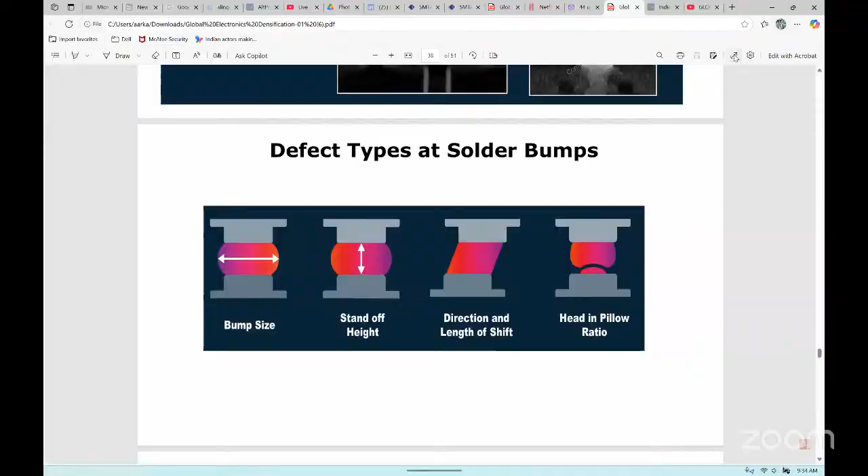Okay, great. Amba Prasad, before we jump onto the slide, can you give some background for our audience about what feedback and feed forward mechanisms in DFA are? Yeah, I can liberally say more than 90% of our audience are already aware what feedback is. It was there long ago. You do a design and you go for manufacturing, and the manufacturer will give feedback that certain components they're not able to mount or they're not able to meet certain parametrics. That is feedback. You take care of it in the next revision.

But feed forward means through design, proactively, we control things and we say to what extent you can tune, and then we freeze stack ups and termination values and things like that. And we tell the manufacturer to what extent they can tune and that they cannot go beyond the process window. So that is feed forward. Feed forward is fixed based on PDKs and ADKs given by the semiconductor fab houses.

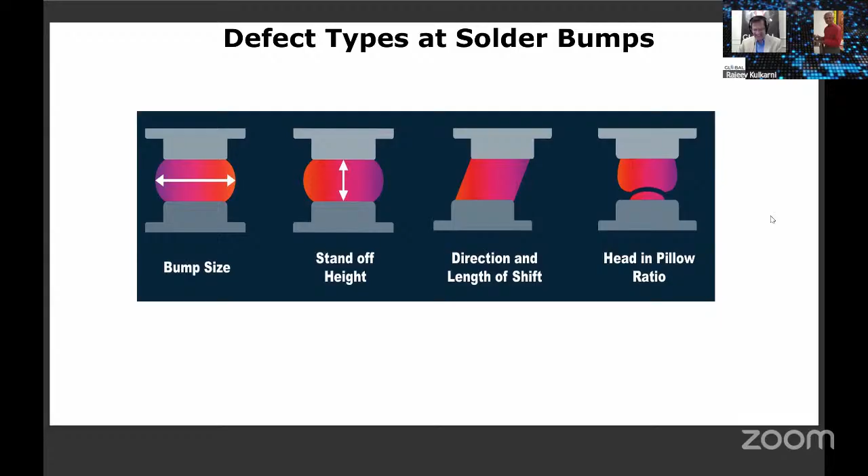When we were talking about the introduction of the session, you were talking about electronics in automotive, right? 40 years back, the only electronics in automotive was the car radio. Maybe the buses had TV for entertainment. At least in India, we had video coaches where people used to watch TV, and that would cost more than the non-video buses. And today, we can very loosely say a car is a computer with wheels. It has so much compute. Latency is as important in ADAS as it is in any high performance computer.

In the previous session, we told what defects we can find in assembly of a BGA component: bump size going from left to right, and the standoff height, which is very critical in low profile components. And tilting: the schematic shows tilting left or right, but a BGA can tilt in any 360 degrees. One set of balls can tilt left and another set right at the same time. It's a nightmare scenario, a total defect, which leads to failure.

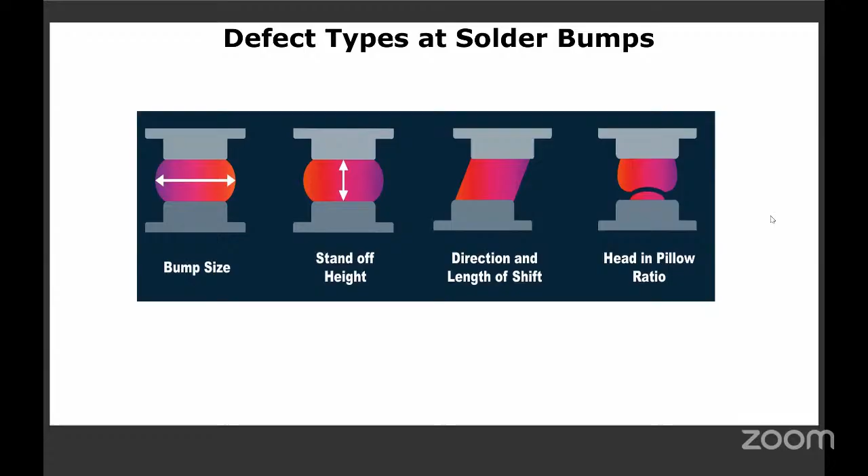And head in pillow, this is another defect. Basically, the connection is not made. Go to next slide, please.

When we say luxury, people think luxury means more cost. If somebody starts selling Apple phones at a throwaway price, nobody will buy it. They think something has gone wrong there.

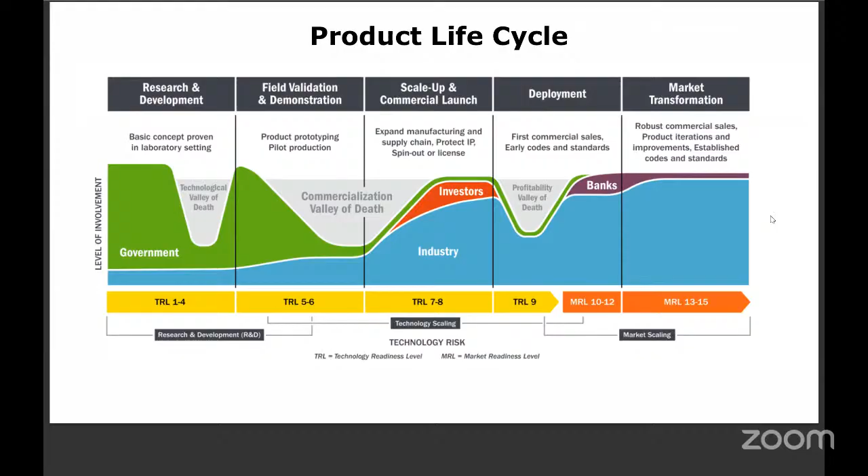Very well said. Very well said. Okay.

Feedback and feed forward data management.

When we say product design, especially high-end electronics, even your assembly process starts in the design itself. The decisions are taken upstream. This is called shift left. Whatever decisions we are supposed to take at the assembly level, we take at the design level itself. We freeze certain parameters and feed this data to our assemblers, telling them what they have to do.

This can be through a digital twin, or through NDA, whatever it is. But your EMS houses will be ready with dummy runs or trial runs even before they hit the actual component. Design data we share includes CAD files, manufacturing data, machine settings, process parameters, inspection criteria.

Nowadays, inspection is only through AI. When we say inspection, don't think of inspection using a field glass or a magnifier. Those days are gone. Now everything is through AI.

Assembly data includes component placement, soldering profiles, solder paste inspection, testing results, maybe flying probes, AI models—everything is through AI. It is totally driven by AI. That is true.

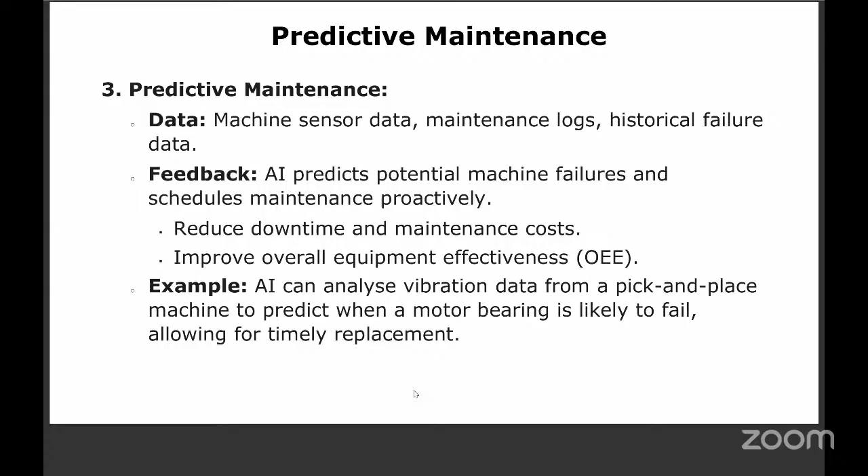Example: AI can analyze vibration data from a pick and place machine to predict when a motor bearing is likely to fail. This is not in the PCB itself, it is in the PCB assembly machine, which has a lot of sensors, motors, and attachments. There is wear and tear for them, and if they fail, there can be mechanical inaccuracies, lack of alignment, or the enemy number one - ESD, machine induced ESD, which is the biggest threat. This can be stopped by predictive maintenance.

DFX feedback - design for excellence. Sometime back, DFM meant manufacturing of a PCB, DFA meant assembly, DFC is cost reduction, DFQ is quality - designed for quiet operation, designed for quality. There are so many issues, designed for environment, and so on. But IPC and other industries now call it all DFX, design for excellence, which contains DFA to DFZ, everything.

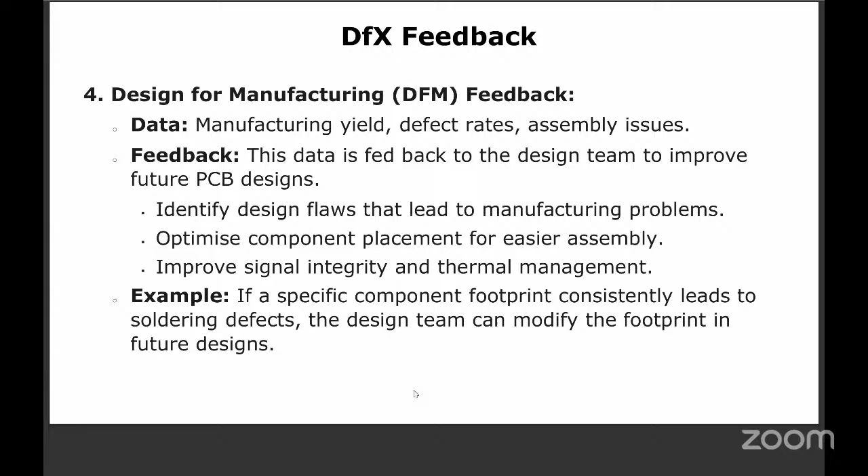Now, this is where we focus on feed forward data. Feed forward in data management involves using predictive models and simulations to anticipate and prevent problems before they occur in downstream activities. It is shift left, or shift left of left.

Sometimes people will be upset - for example, you go to a CAD person, he looks at the symbol and says, I will not place this till you get it corrected. Sometimes they are right, I have encountered this many times. People thought I was being authoritative, but it's not true - you have to be a benevolent dictator, only then can you handle this. It is very difficult to convince people, especially when something is wrong, it's not an easy task - you have to break the bad news and people will correct it. In fact, companies nowadays, if there is a problem in the datasheet and you tell them, earlier they used to give mugs and t-shirts as a gift, but now companies have started giving design kits to make it more useful. So people are also happy to get the feedback.

Simulation and modeling use CAD data, material properties, process parameters. In feed forward, AI-powered simulations are used to predict thermal stress during soldering, even before soldering starts, and signal integrity at high-speed traces. For example, let's say...